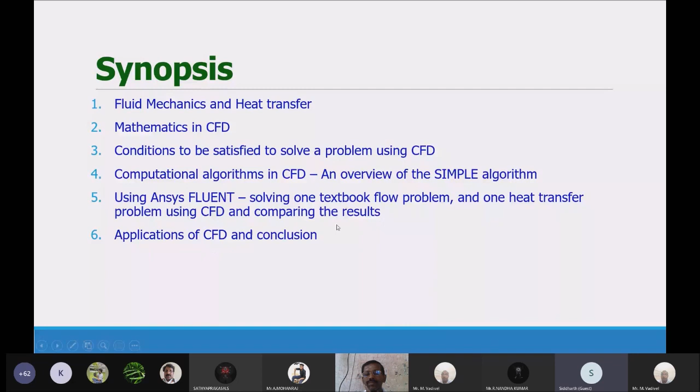In addition to this, I may use small forms of humor in order to lighten the mood, so as to not make it boring for you. So I sincerely hope that by the end of this session, even if you may not understand the mathematics involved in CFD, you may be able to grasp the intuitive understanding of how a textbook problem can be realized on an industrial scale.

So coming to fluid mechanics and heat transfer. So can anybody define what is a fluid?

It is right there in the slide. Anybody can just even read it for me. Could anyone tell what is a fluid? It can be a student or a professor, anybody. Hello.

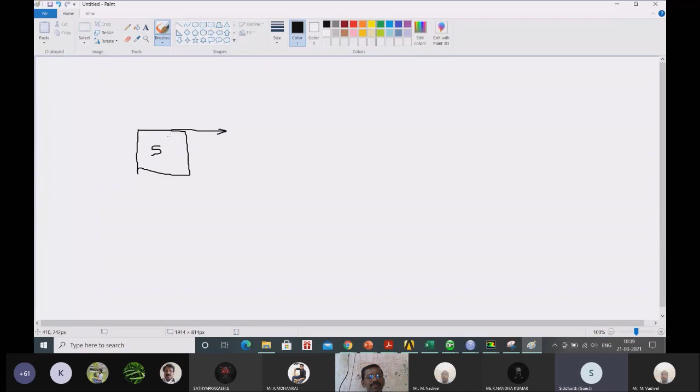So this seems to be extremely technical. So what do I mean by that? Basically, let us consider a solid block. A shear force is a force that is tangential to any surface. Tangent means it basically rubs the surface on which it is applied. So let us say I apply a shear force like this on a solid block.

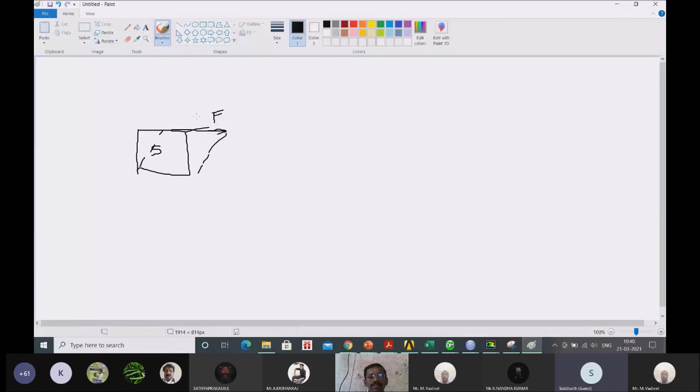What it will do is, it will tend to change this particular cuboid into a parallelepiped like this. And depending on how elastic that particular material is, once I remove this particular force F, it will revert back to its original form. Whereas if I do the same thing for a fluid, however small that particular force is, the fluid will start moving.

You can try this. Just try rubbing your hand on the surface of the table. The table will obviously not move. And you can try the same thing with a bucket of water and try moving your hand on the surface of the water. The water will start moving, however small the force is. So this is the meaning of a fluid: it deforms even with the slightest amount of shear stress that is applied on it.

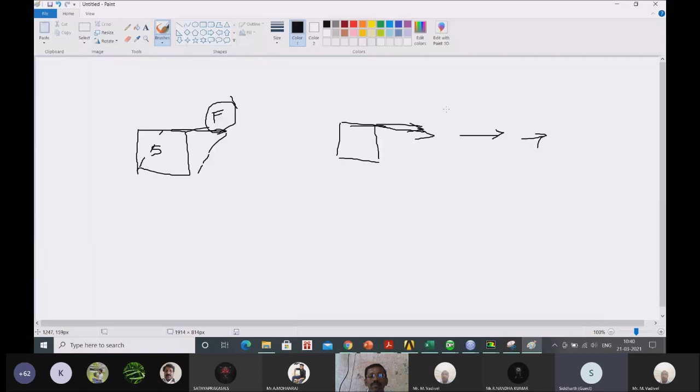Whereas if we take, why not normal force? Because let us say I have a bucket of water like this, and if I take a ramrod or a piston and apply a normal force on this, it will do nothing to the water, because there is no space for the water to move. And if the force is large enough, it may distribute the force along the surface of the bucket, and it may cause the bucket to break, provided the force is high enough. But other than that, it will not cause the water to move at all under any condition.

So a fluid is something that cannot resist a shear stress, but can resist normal stresses. Normal means 90 degrees with respect to the surface. That is the meaning. Let us go back to the lecture.

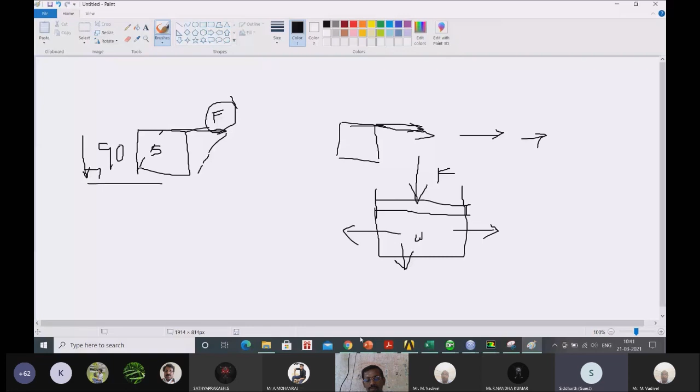So the next one is, what is heat transfer? Heat transfer is a form of energy transfer that takes place as a result of temperature gradient. Basically, as long as the temperature of any body is above absolute zero, that is 0 Kelvin, if two bodies are in space, energy transfer will definitely take place between them.

So can anybody name the three forms of heat transfer that take place? Can anybody name the three heat transfer forms? Convection, conduction, radiation. Could you briefly explain what is the difference between the three?

Hello? Yeah, the names are correct, that is there. So what is the difference between the three? Okay, I'll make the questions such that you can answer in one word. So, which form of heat transfer does not require a medium for it to happen? Anybody?

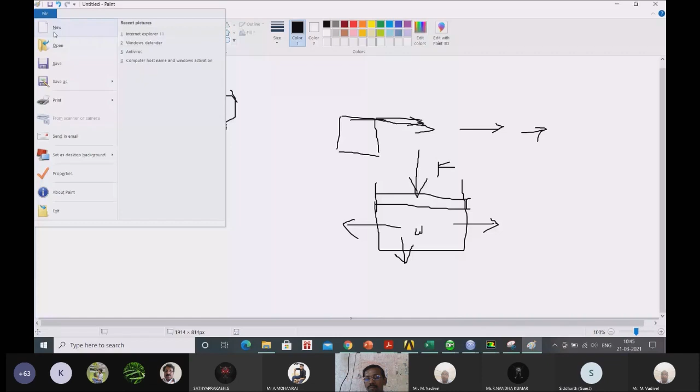What is momentum? Anybody? What is momentum?

So in simple terms, momentum is mass into velocity. As a result of change in momentum, let's say one momentum is mv and a different momentum at a different time is mu, the difference in momentum will cause what is called an impulse. Impulse is nothing but force multiplied by time.

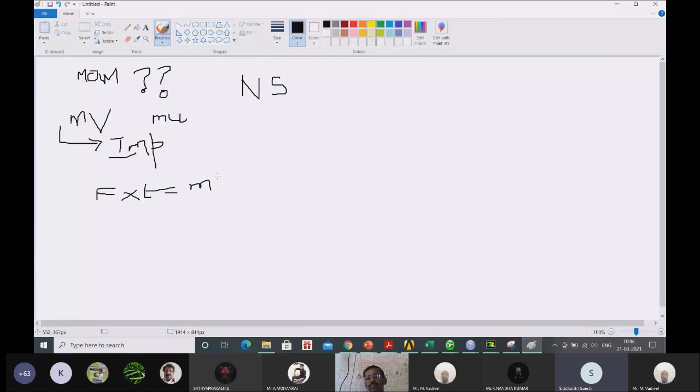So we can take m common, so F will be m into v minus u by t, which is basically ma. This is the second law of motion by Newton. So Navier-Stokes is nothing but Newton's second law for a particular fluid. It is a tricky partial differential equation, but ultimately it is just Newton's second law. So I'll write down the Navier-Stokes equation.

So, rho du by dt is equal to minus del p by del x plus viscous forces plus any other source term or body forces.

Basically this is the total derivative of the mass into acceleration term here. So you have du by dt, and instead of mass here there is density, because everywhere I have divided by volume, so mass by volume is density. This term is the acceleration term, this is the pressure force, this is the viscous force, and this is any other source term that is causing the force. Body force is nothing but the weight of the body, or generally when influenced by gravity, body force is nothing but the weight.

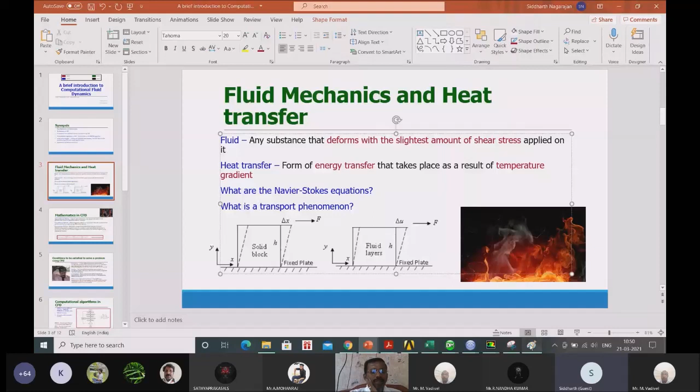And then, what is a transport phenomenon? Basically transport is nothing but movement of something from one place to another, that's the simplest way possible. If we take any pipe, for example, a liquid will come in here and go out here. This is called mass transport, and this is where your continuity equation comes in.

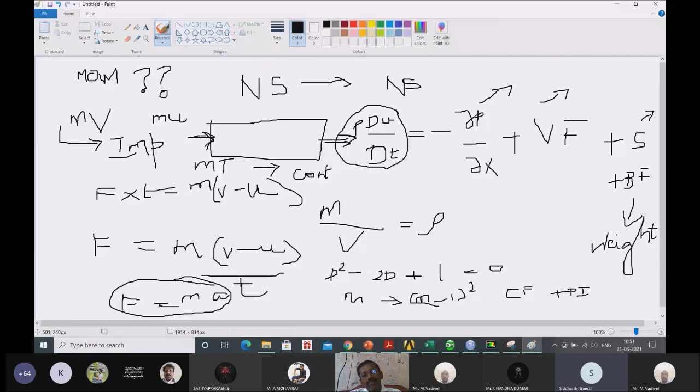And similarly there is something called momentum transfer, which is what I explained now. So basically if I apply a force here, it will find a way to get transmitted to come out here. So basically momentum in will be equal to momentum out, similar to how mass in is equal to mass out. The same way there is a momentum balance.

And then the third form of transport is called energy transport. Whatever energy I give into a system has to come out of the system, and all of these are assuming steady state conditions. Under a transient condition, whatever is being stored inside will also get accounted for. So in simple terms, it is enough to remember this: whatever goes into a system must come out of a system in steady state. That is what I mean by transport.

Now coming to the mathematics of CFD.

And if anybody feels like, what is this nonsense, I don't understand anything - if you feel that way, it's okay. You will be able to appreciate whatever I'm going to be telling you.

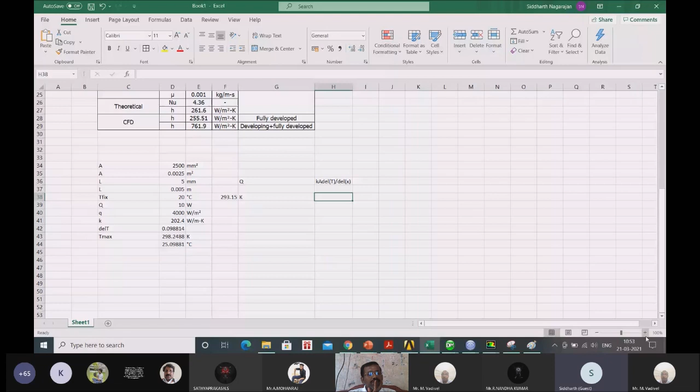So we know by Fourier's law of heat conduction that Q is equal to minus Ka into dt by dx. So dt by dx is differential calculus - it is a very small term. Anything dt or dx is very, very, very small, it is infinitesimal. So when you take it for a large value, it may fail.

So what you do for that is something called discretization. The meaning is that you divide your domain of interest. For example, I want to solve a conduction problem for a plate.

Let us say the plate has an area of 2500, each side is 50 mm by 50 mm. There is one plate and it has a thickness of 5 mm. So for that particular problem, we can directly get the value of maximum temperature when we solve for Q equal to minus Ka dt by dx.

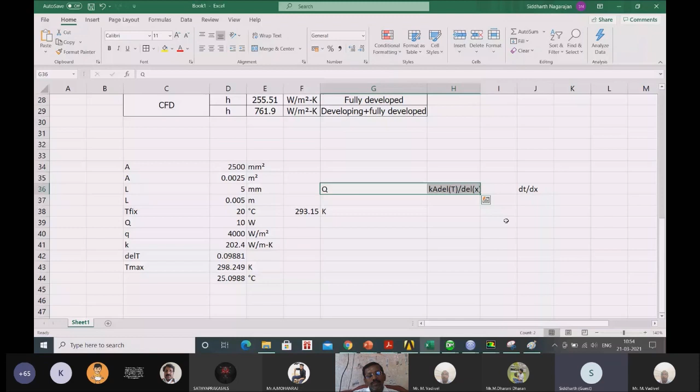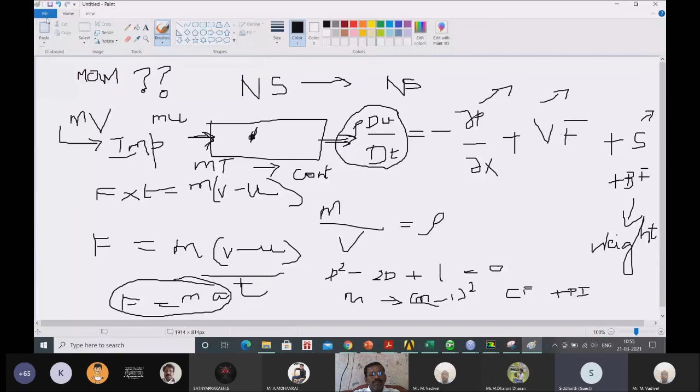So for not-so-simple geometries, unlike just the plate I've considered, what we have to do is discretize that particular domain into small boxes. So how we do that is, let me show you. Sorry, file, new, don't save.

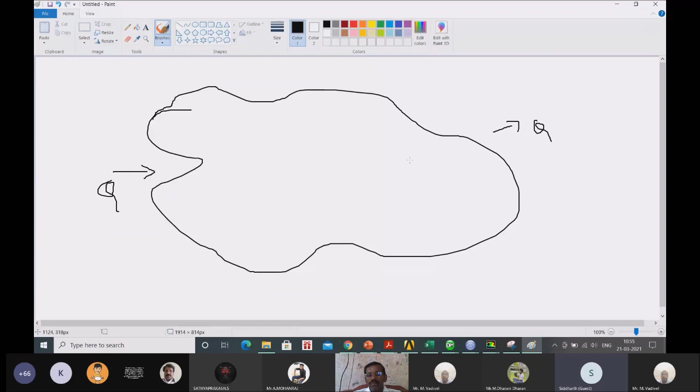Yeah, so let us consider any irregular shape. Mind you, whatever governing differential equation is there - let us say I give Q amount of heat, it will find a way such that the Q comes out under steady state. That is what the energy balance will say. So it will manifest in such a manner that there is a gradient of temperature within this.

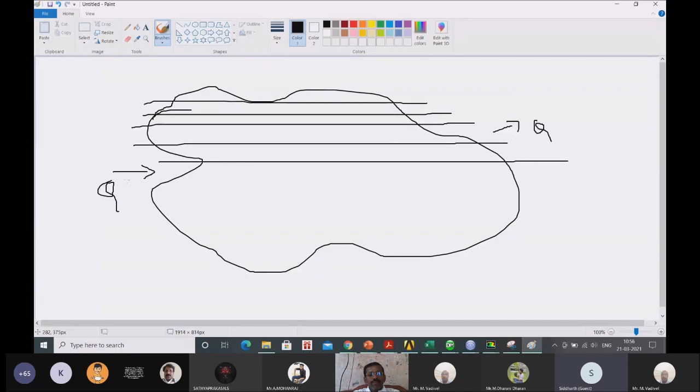So coming back to the point, what is finite difference method? Finite difference, finite element, or finite volume - all of them have this process in common. This discretization is called dividing the domain into small chunks along all the axes.

So in any solver that you use in any CFD software or FEA software, this process of discretization is also called meshing. Whatever is the result of discretization is called a mesh.

So what we'll do is take this small chunk, and if it is a conduction problem, we'll solve Q equal to - sorry, not dt, del T by del X into K. This Q is Q by A, this is flux. So this is how we'll solve.

So basically, this is delta X, the size of the cell, and K is the conductivity of the body, and delta T is something we will be finding out, and Q is the amount of heat transfer in the X direction. Let us call this qx. So this equation will solve in the x direction.

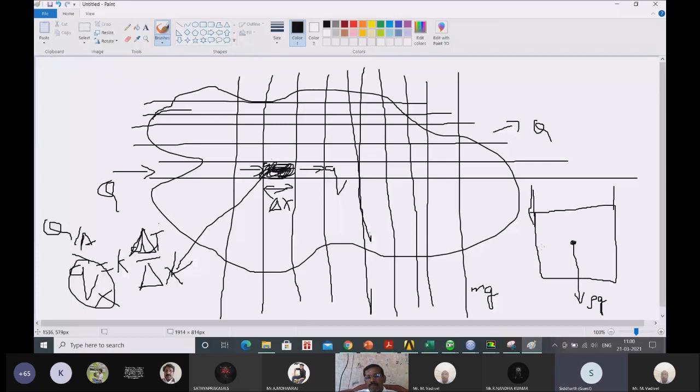Let us say this is one fluid element with a weight of rho g, the specific weight, meaning since mg is the weight, I have divided by volume to get weight as rho g. Now let us say this is contained within a container. For it to maintain equilibrium, this body force is equalized by the surface forces exerted between the walls of the container and the fluid.

This weight will exert a pressure on the sides of the wall as well as on the bottom. So we can infer that the pressure multiplied by the surface area of whatever is touching the liquid surface will be equal to the force, mg. So P into A will be equal to m into g.

That is the reason why this is in equilibrium. So I have converted this weight, which is with respect to volume, into pressure into area, which is a surface. I hope this clarifies what I meant by volume integrals being converted into surface integrals using the divergence theorem.

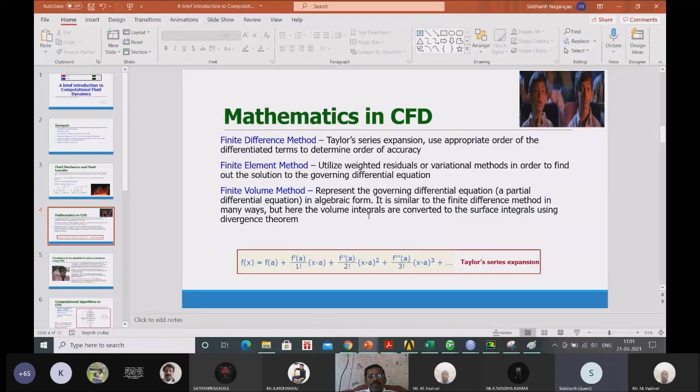So this is the outlook of the mathematics used in CFD. The next topic is the conditions to solve a problem using CFD. Seeing terms like consistency, stability, convergence, and Lax's equivalence theorem, students may have certain reactions, but...

These are all to be taken literally. The literal meaning of consistency is what aids us in solving the computational fluid dynamics problem. So what is consistency? Basically, a finite volume approximation is considered consistent if the truncation error can be reduced to zero as the time step and mesh size are reduced.

The meaning is very simple. Going back, I said this will have one governing differential equation, where it will have, let us say, dt by dx, k is equal to q. The difference between dt by dx and del t by del x is the size that you consider. So as del x approaches 0, this becomes dt by dx. That is the meaning.

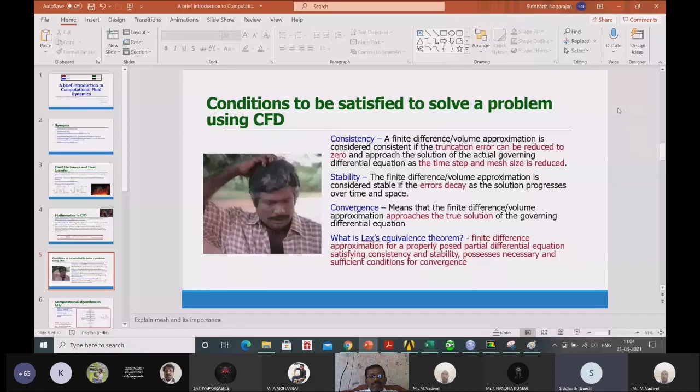Now, coming to this, next is stability. Since I said that my CFD solution is an approximate value, as I solve the problem, as each iteration progresses, my error must decay. Error decay means that the difference between the actual solution and the CFD solution will go on minimizing. And when the solution finally converges, the error must be as minimal as possible in order for it to be reliable. So that is what is called as stability.

So when is a solution unstable? If, for each iteration, the error becomes greater and greater, and finally you will not get the correct result at all, that is an unstable scheme. So for us to have a good CFD solution, the error must go on minimizing as it solves the problem.

That is the crux. Then coming to convergence. So what is convergence? It means that your approximate solution will approach the true solution of the governing equation. That is convergence, in very simple terms. And it can be defined in a mathematical way also: if you iteratively solve a problem, you should have the same solution for two continuous iterations for it to be considered as converged.

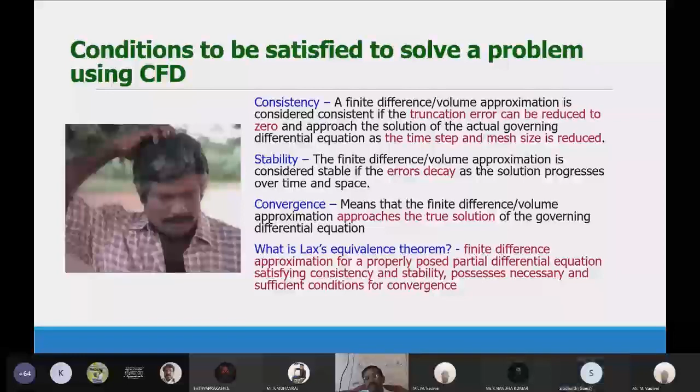Now, let us see what are algorithms in CFD. An algorithm is nothing but a way to solve a particular problem. It is just giving you a guide, like it gives you the path. Okay, I have this problem, I need the solution. So what is the path for me to get the solution?

So please don't get overwhelmed by the amount of data that is being put here. It's actually very intuitive. So I'll explain this particular flowchart before I explain what all these are.

So I'll explain the solution method using what is called as the SIMPLE algorithm. You will have the initial set of values, and initially what I said as the momentum equation, the Navier-Stokes equation, F equals ma, basically Newton's second law, that you will discretize using the methods that I specified in the previous slide. It is either finite difference, finite element, or finite volume. So in whichever method you have discretized, take that discretized equation and solve for momentum.

By how will you solve? Because I said you just have to guess a value and find out one solution. You just have to guess and plug it into the equation and see what result you are getting. So you will solve the discretized momentum, then you will solve something called as a pressure corrector.

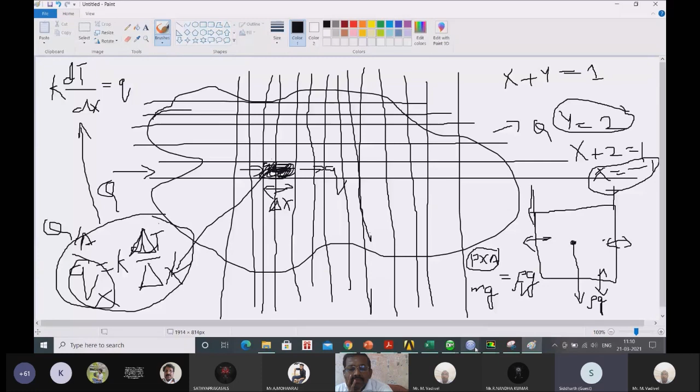So at the end of solving this particular algorithm, you will get the converged solution. This is called the SIMPLE algorithm. The meaning of SIMPLE is semi-implicit method for pressure-linked equations. So what you're solving here is nothing but the equation for pressure and the equation for velocity. The meaning of implicit is that...

You cannot express one variable fully in terms of another variable. You will not be able to separate the variables on both sides of the equal-to sign. So what do I mean by that is...

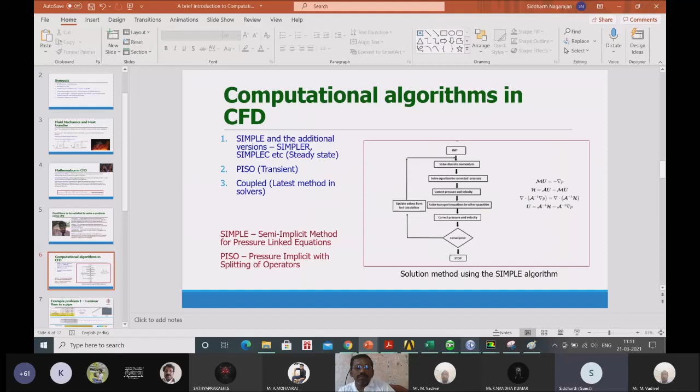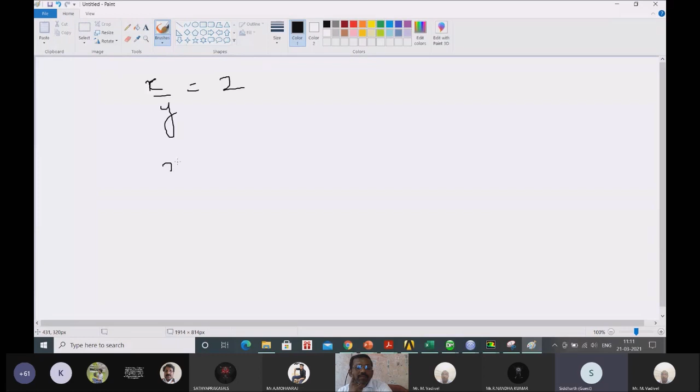Basically, if I say x by y is equal to 2 or something, I am able to separate this like x is equal to 2y. So this is explicit.

In a case where I'm not able to separate these two variables, let us say I have tan of xy equal to root of y by x square plus y square, something like this. I don't know if this is separable or not, but there's a good chance it is not. If I'm not able to separate the x and y values on both sides of the equation, then that becomes implicit, and it's very hard to solve.

So for those equations, we'll have to follow an algorithm like this. This is the SIMPLE algorithm, and there is something called the PISO algorithm, which is pressure implicit with splitting of operators.

The difference is that this approach will start from pressure only. It will solve the momentum only once, and it will iterate until we get the correct pressure value, and finally substitute to get the correct velocity. So basically, it will save a lot of steps. Instead of solving momentum in every iteration, it will skip that until the last iteration.

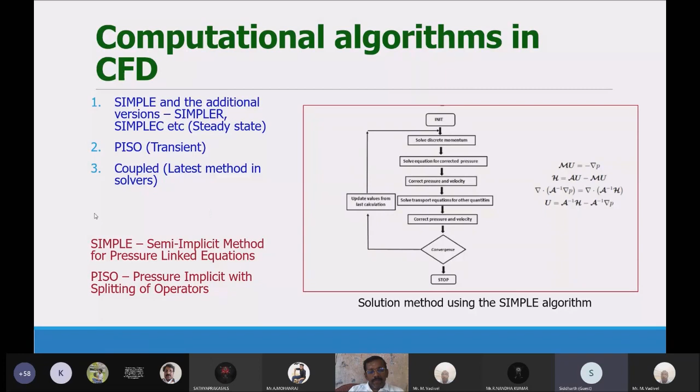These will generally be available as an option to select directly in a CFD solver. So you don't have to write all of this as code. You will directly have this in the GUI of a commercial software. However, if you want to code this on your own, you can do that, but your grasp of mathematics must be very good. So now let us see two example problems.

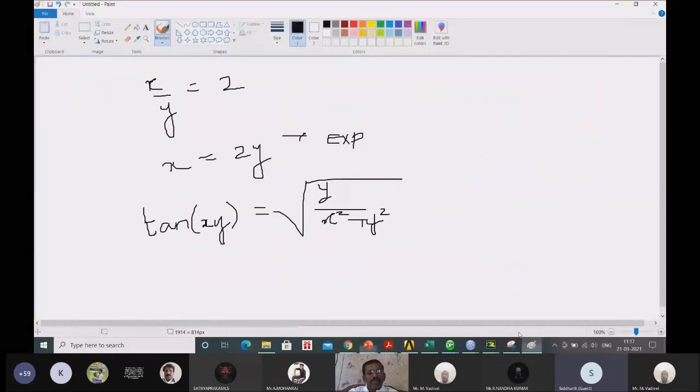So can anyone tell me what is a fully developed flow? Anybody? Hello? Okay, so fully developed flow is easy to understand.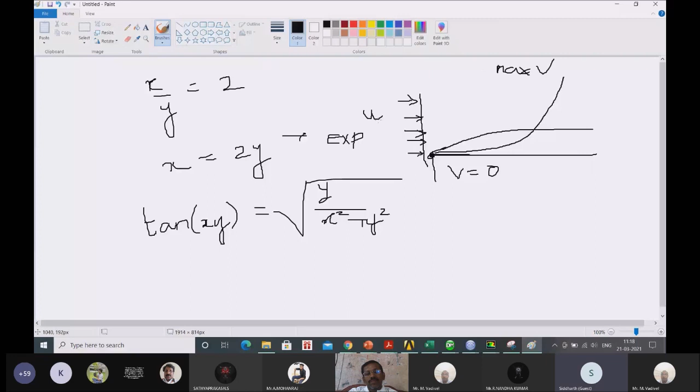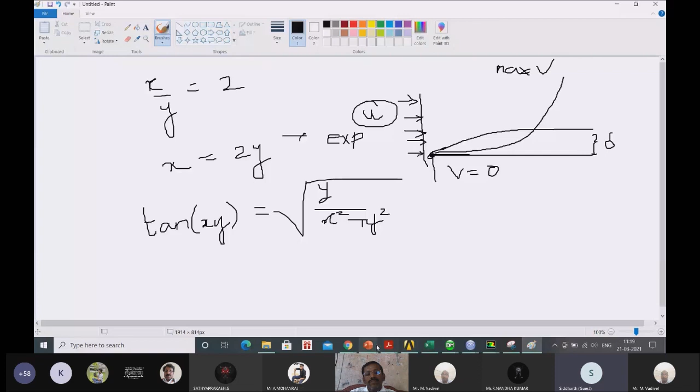So the point at which your maximum velocity becomes almost equal to the free stream velocity is what they call this. When these two almost become equal, that particular thickness will be called the boundary layer thickness, delta. So why am I saying all this? Because adjacent to the solid boundary, the fluid has to have its boundary layer captured.

This is very important in a CFD problem. In order for it to get captured, we need to mesh it in a different way near the wall. So that is why understanding boundary layer is important.

So basically, a fully developed flow is one in which the boundary layer has been fully established, and the mean velocity, the average velocity of this curve that you take, will be equal to u, but it will have a higher velocity in the middle in order to compensate the fact that it has lost velocity near the wall. So it's basically a consequence of Newton's third law. It comes with a velocity u, this wall makes the fluid go to 0 velocity, so in order to compensate for this loss in velocity, it increases in the middle. So here it is reducing, in the middle it is increasing. This is a consequence of Newton's third law.

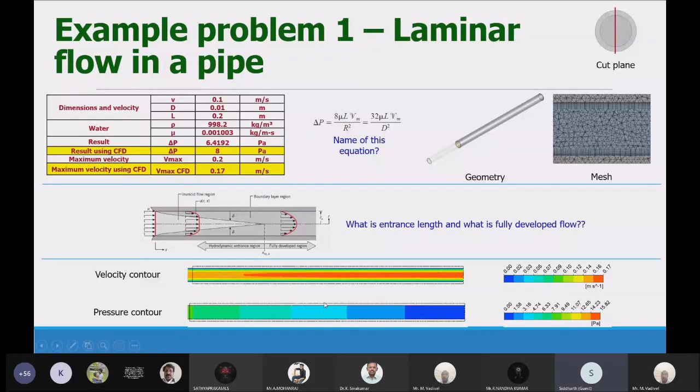So this is the velocity contour and this is the pressure contour for the pipe when I cut it and take the section.

So the next problem, we'll consider the same dimensions, but here we'll do it with heat transfer. Considering laminar, viscous, incompressible flow, we know that Nusselt number is a constant, 4.36. Using this 4.36, water conductivity of 0.6, and the diameter of the pipe, we will find the heat transfer coefficient. Theoretically, we have found out that 261.6 watt per meter square Kelvin is the heat transfer coefficient by plugging in the values of K and D.

Then we can find out the same values of heat transfer coefficient by using CFD. Since the problem setup is the same, here also we'll have to be careful whether the flow is developing or fully developed. For developing flow, the heat transfer coefficient is always very high compared to the fully developed flow. For fully developed flow, we can see it is closely correlated, and we can also get the particular velocity profile.

As I said, we are supposed to get 0.2 here, but here we are getting somewhere close to 0.17. So whatever contour you are seeing here, I have plotted the velocity profile using CFD. So now what we'll do is...

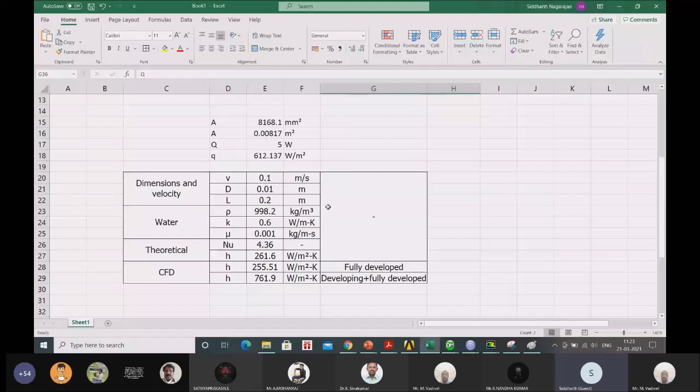We'll solve, I'll explain the steps how to solve a particular problem using the ANSYS Fluent software. First, let us see a conduction problem. Let us say I have a plate, and that particular plate is of dimensions 50 and 50 mm and has a thickness of 5 mm. So this is my body.

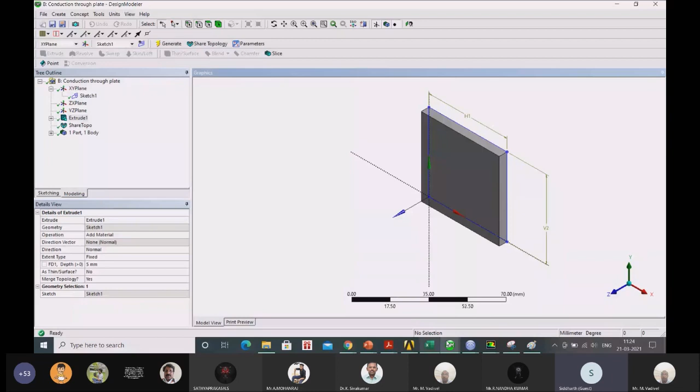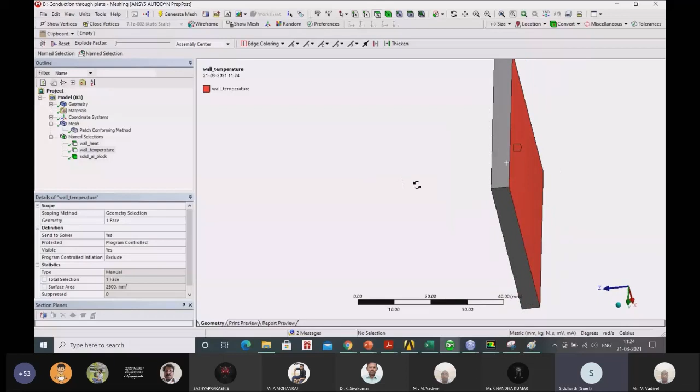Once I model the body, I discretize it into something like this. This is what you call the mesh. On one surface, I will designate it in order to apply the heat. On another surface, I will designate it for it to be a fixed temperature. And I will consider this particular solid to be aluminum.

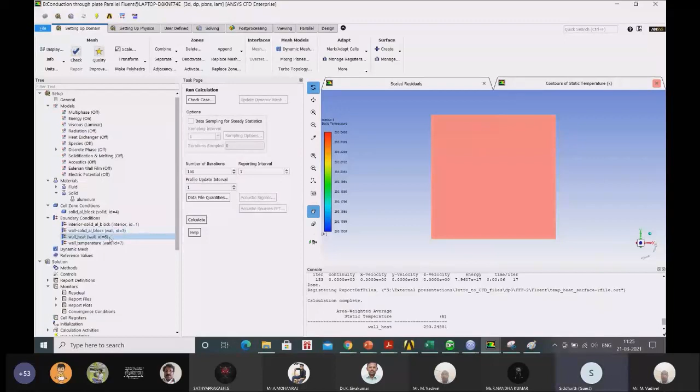So coming back to Excel. Let us say on the wall that I'm applying heat, I'm applying 10 watts. We know the flux is nothing but the heat divided by the area through which it passes. So 10 divided by 50 into 50 is 2500. Converting to meters, it is 0.0025, so you're getting 4000 watt per meter square. I'll be applying that in Fluent, the commercial CFD software used to solve this. So I'm applying 4000 watt per meter square as the flux.

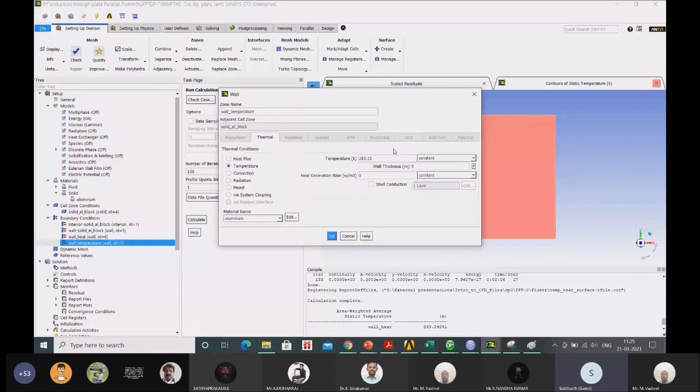And on the wall where I'm fixing the temperature, I'm applying 20 degrees Celsius. If you add 273.15, it is in Kelvin, so 293.15 is the wall on which I'm fixing the temperature. I fix a temperature of 293.15. Here I have assigned the material as aluminum, and for aluminum, the thermal conductivity is 202.4. So we know Q is equal to K times A times dT by dx.

So Q by A I directly know, that's 4000. That multiplied by delta x and divided by K will give me what is the delta T. In delta T, we already know what temperature we are fixing. So T max minus T fix is what is my delta T.

So if I want to find what is T max, it is very simply equal to, you just have to take this T fix to the other side, just add the T fix to the delta T. So I'm getting a T max of 293.2488 Kelvin, which is the maximum temperature on the surface that I apply heat.

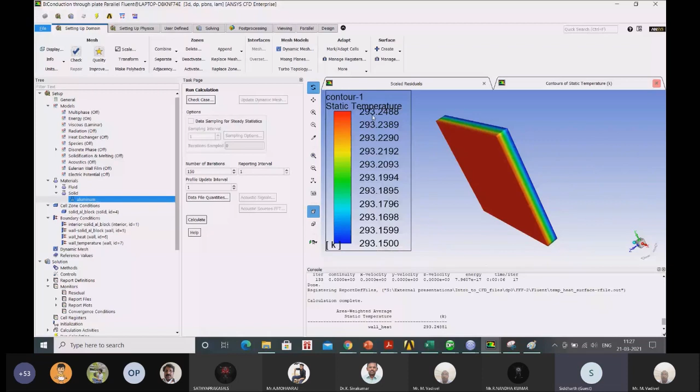So if I solve my problem, this is where I have applied the 298. On the surface that I have fixed the temperature, that is 293.15, and on the surface that I've applied heat, we are able to see an exact match of 293.2488 as we have obtained in the theoretical formula. So this is how we solve the conduction problem in Fluent.

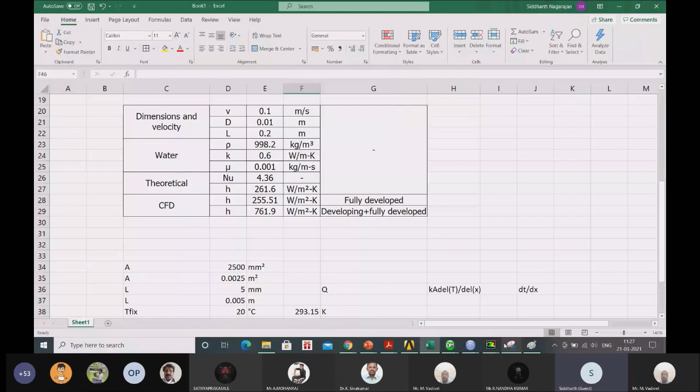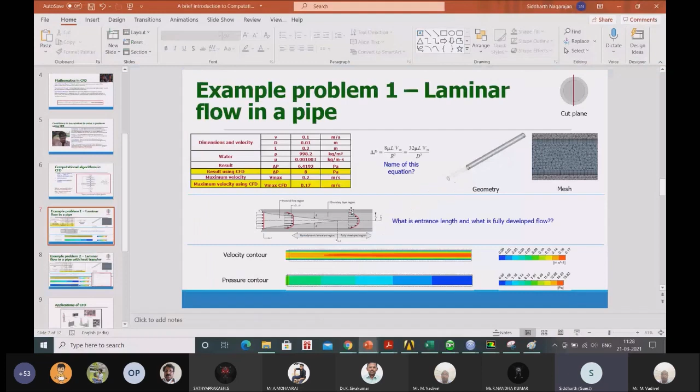Now let us see how to solve the same pipe flow problem that I explained. This particular extrusion that you see is simply to account for the developing region. In order for me to have fully developed flow within this pipe region, I have put this extrusion for the flow to develop. So I have modeled something like this.

Basically the inner diameter is what is important for me, 0.01 meter, and the length is 200 mm. So this is my pipe. Once I model it, I'll mesh that.

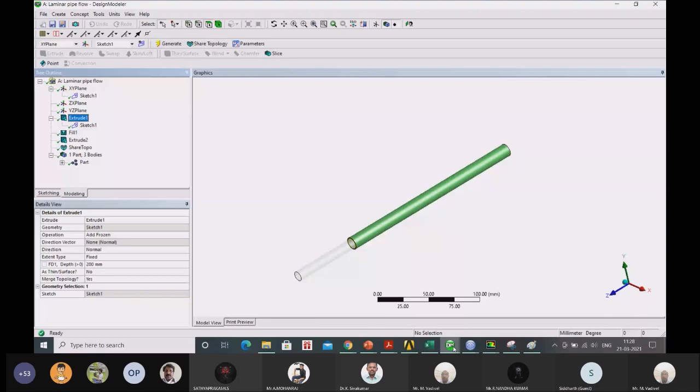So this is the cross section of the mesh. Once I mesh that, I'll take this to the solver and give the boundary conditions. I'll assign that the fluid is water and the solid is aluminum. It doesn't matter, like.

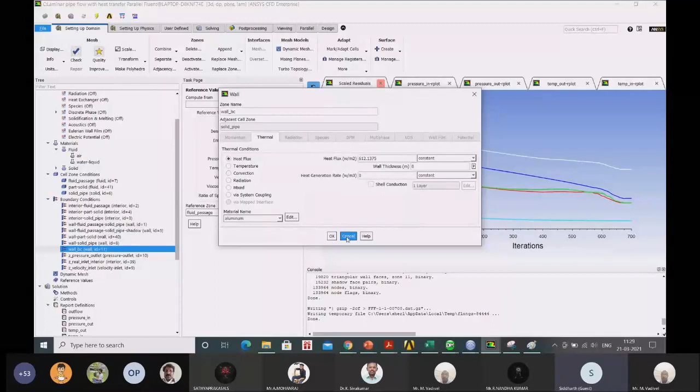Then for constant heat flux condition, as I said, the Nusselt number is 4.36. So I've applied a flux of 612.1375. It can be any value, since for this particular type of problem, the Nusselt number is always constant. Then at the velocity inlet, I have given the value of 0.1 meter per second.

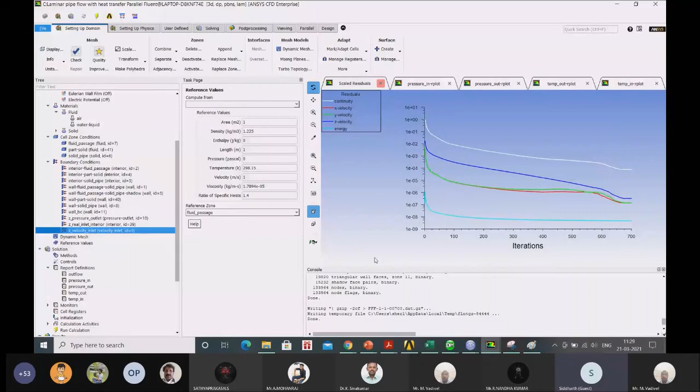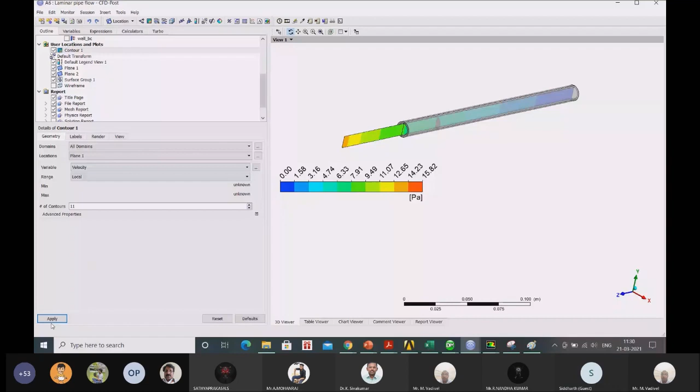And then I have solved the problem. Finally, we can cut a plane wherever we want. Like this is my pipe, and here we can cut wherever we want. We can create planes wherever we want to see the particular variable that we are interested in. So I have plotted pressure here, and I can plot the velocity by changing this particular thing.

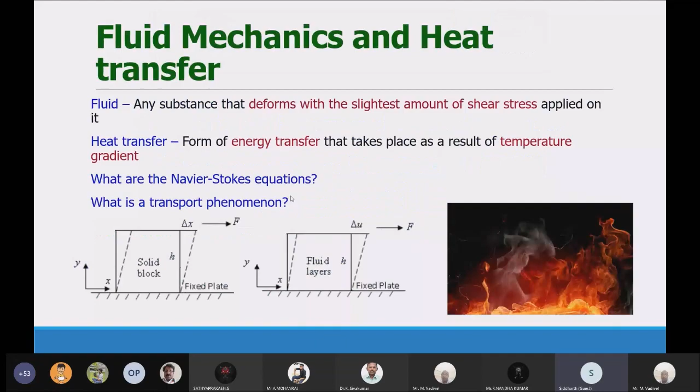Nobody should actually just solve the problem using CFD and say, okay, this is my result. You should always keep in mind that this is an approximate solution. So it needs to be validated either with an experiment, or it has to be validated using an analytical explanation, like I did now. Only then is it believable. Otherwise, it is simply a rainbow color plot on the presentation, for aesthetic purposes, and it doesn't really add any technical value. So for you to have an extremely meaningful result, it always has to be correlated with an experiment.

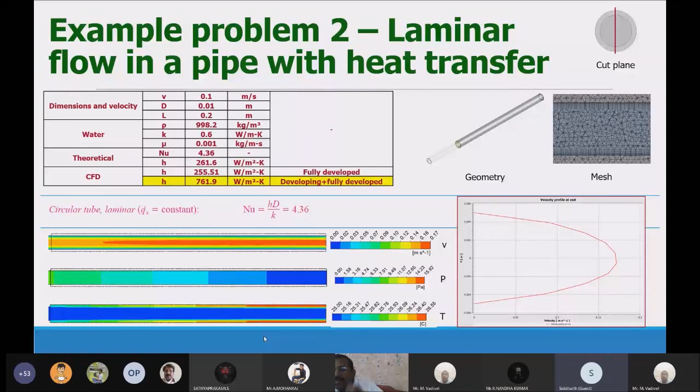Coming to air conditioning systems, they again have refrigerant systems, with refrigerants flowing within the fluid circuit. Circuit boards produce a lot of heat, and for them to stay at the right temperature, they need appropriate cooling, either by natural convection or forced convection. Then in car radiators, power plants, and refrigeration systems. Apart from this, there are applications in aerodynamics, like external aerodynamics of a car or a plane, and you can have combustion within an IC engine, and the temperature distribution on the wall of the IC engine because of the combustion happening inside the combustion chamber, and a lot of things like that.

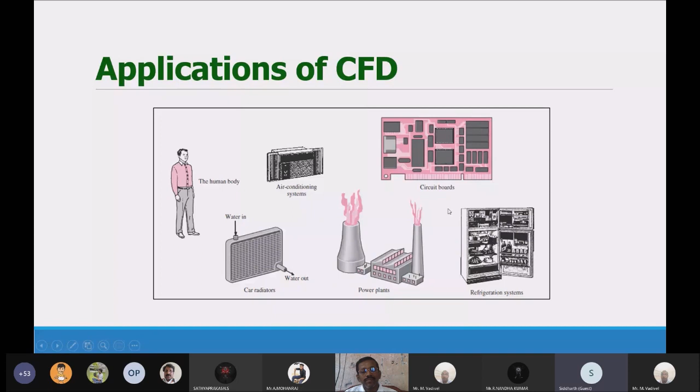So imagination is probably the only limit for the application of CFD. It can be used in anything wherever you have a fluid. And finally, conclusion: what is computational fluid dynamics? I haven't answered that question until now at all. So computational fluid dynamics is a tool used to solve complex mathematical problems involving fluid flow, heat transfer, combustion, species transport, chemistry, and quite a lot of other physics that you may see.

Because simple formulae in pure theory cannot be used for complex geometries to solve a problem. Similarly, pure experimentation is extremely costly. You cannot go do experiments and make prototypes for complex geometries every time; it will cost you crores of money. So we need to find a way such that the cost is minimized.

So that is where computational fluid dynamics comes in. Without actually making the prototype, you can simulate what would happen under a particular scenario, and then get the correct results and deliver with respect to the design process that is necessary.

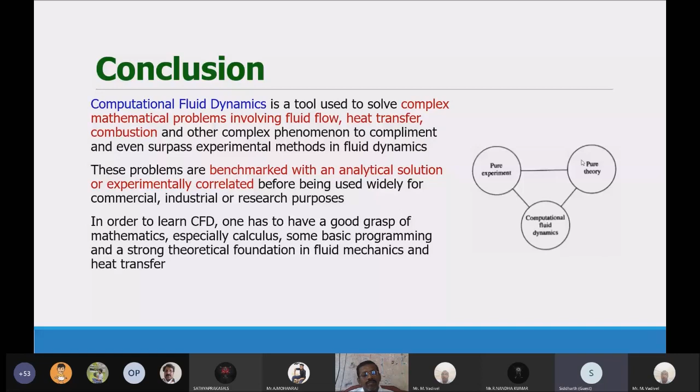And finally, in order to learn CFD, one has to have a good grasp of mathematics, especially some calculus, some basic programming skills, and a very good foundation in fluid mechanics and heat transfer. So this is the conclusion.

The references from which I have taken the pictures or the content are Fluid Mechanics: Fundamentals and Applications by Cengel and Cimbala, Heat Transfer by Cengel and Ghajar, NPTEL lectures on fluid mechanics, Computational Fluid Dynamics by John D. Anderson Jr., and the ANSYS Fluent Manual.